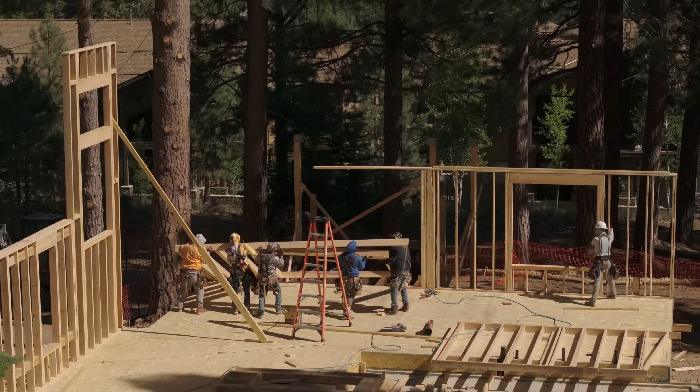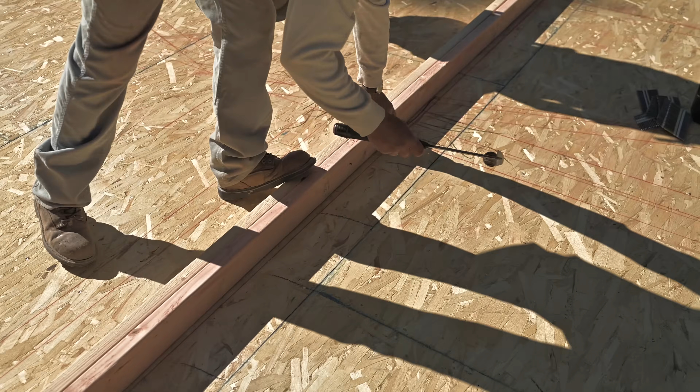First step to building the walls of the house would be we're going to snap the lines. The second would be plating the walls, so nailing together top and bottom. That's the second step. Third step is what I call detail, which is marking where windows and doors go. That's the third step.

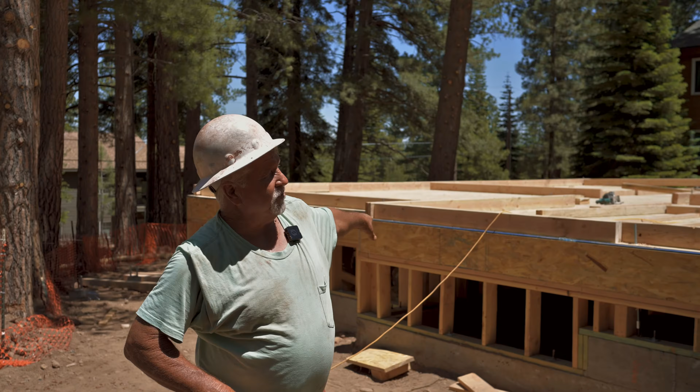So in this particular house, it's not a flat surface that we started with. We have to level out the house. So we call them pony walls. So instead of cutting it down and putting a bunch of dirt, raising it up, doing whatever, it's just easier to build the house with what we call a raised foundation. And then we raise the walls up to make it level to the highest point. So on top of our pony wall, we put the floor joist and the rim, and then that becomes the level surface that we started with for the main floor.

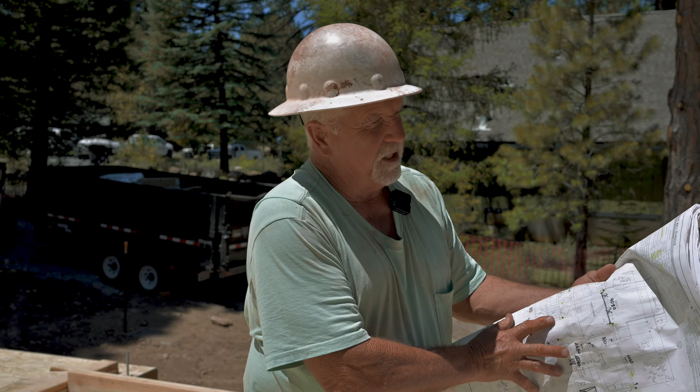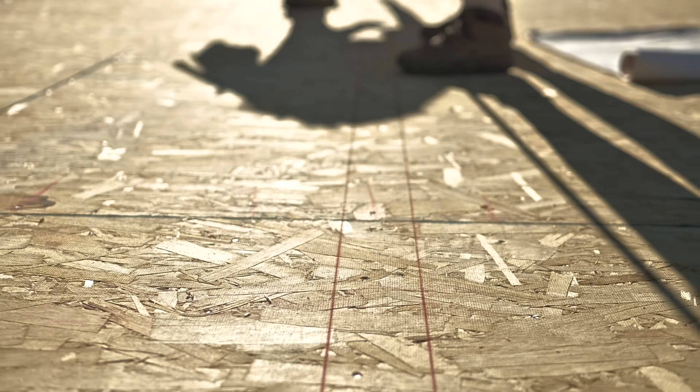First thing we have to do is take what's on the plans and put them onto the plywood, which we snap the lines. Anywhere on here that you see a wall, we snap on here. I use red. And so when we say snap lines, that's what we're talking about. We're marking where the walls go. So what we normally do is we start with the two longest points. So that would be the back of this house. We start there and then we do the far side.

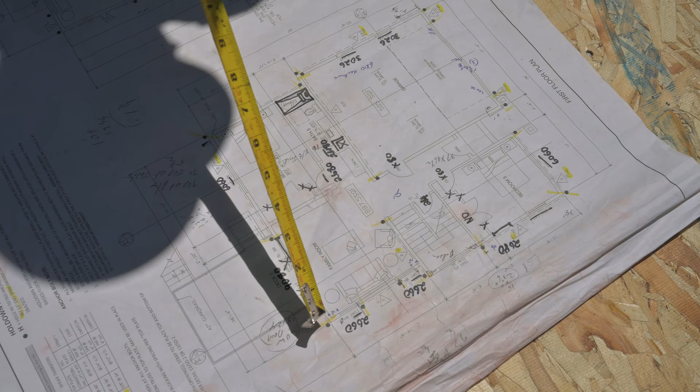Okay, so when we start to snap the lines, we try to start with the longest two points, two walls, which would be, in this case, the back of the house. That's this wall. So we start with this, and then we want to start with the longest side, which in this case it jogs. So we come back the distance that this is, which is 2 feet. So we come back 2 feet here and we go snap this line all the way across.

We make a square, which is basic 3, 4, 5 square. So we go out 15 feet, 20 feet, and then diagonally, we want to be 25. That's basically how you pretty much start almost any house you do. You want to start with the two longest points and go from there. I use a red chalk because it's easier for me to see. This is a chalk box, basic chalk box. It pulls out the string like that.

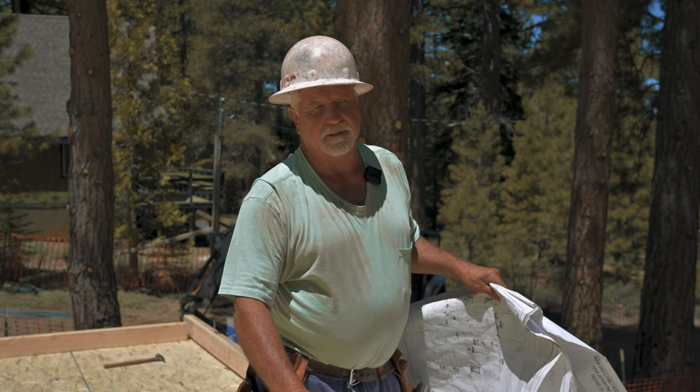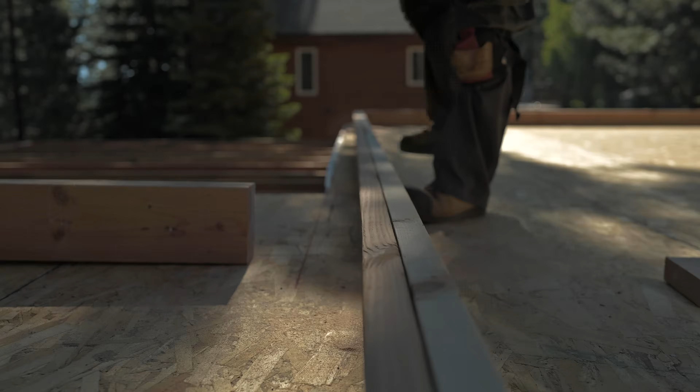The guys have already come along, and the next step they're going to do is they take the top and the bottom of the wall and they nail them together and put them where they go for me to come along and mark what is in the wall. Because if I don't do that, they don't know where anything goes. So what we're doing is these two walls right here. We have a window here, he moved it, so I'm going to mark where this goes. And you'll see how I write. I start from the top, go down.

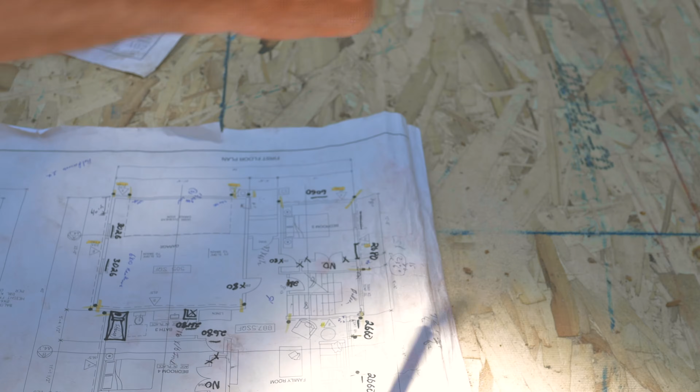This window actually just sits on the floor. It's one of those more contemporary windows, so there are no cripples. This one, you'll see I'll have 3 numbers on it. One is the header, it goes across the top. One is the trimmer, and the other one is the cripples. That's how high it is off the floor. So we'll start here, and then I'll do the front one so you can see what I'm talking about. So it's a 2.6, which is a 33-inch header.

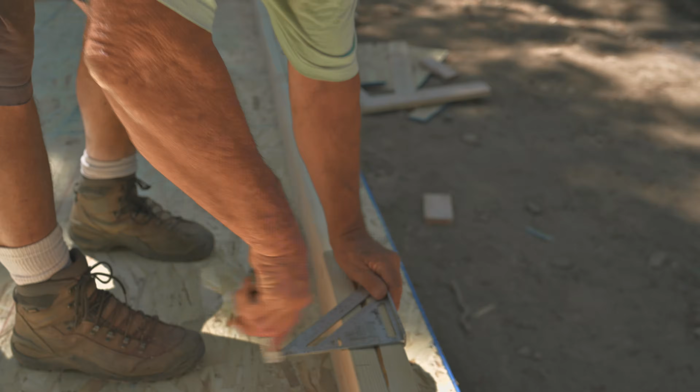That's where this stud goes. The trimmer is my slash. I just put a slash, not a T. Some people do that. I only do that if there's 2. So my guys will know that X is the king stud, they call it. That holds the header, and this is the trimmer, which supports the header. So in this case, you have a 33-inch 6x10, and it goes to the top, so it would be a 94 3/4 trimmer. And like I said, this window goes to the floor, so there's no cripples. So it's just open. It's almost like a door. This is a 6-foot window.

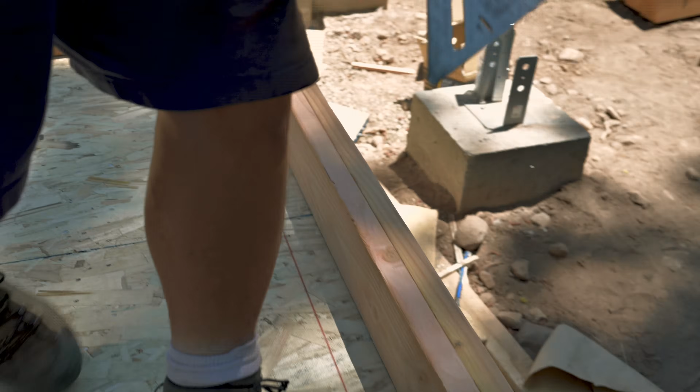Usually anything over 5 feet, you want 2 trimmers. So in this case, I put the slash, and I'll do a T like that. That means 2. Same thing on the other side. So they'll see that. And it gets 2 king studs also. And then a slash with 2, that's 2 trimmers.

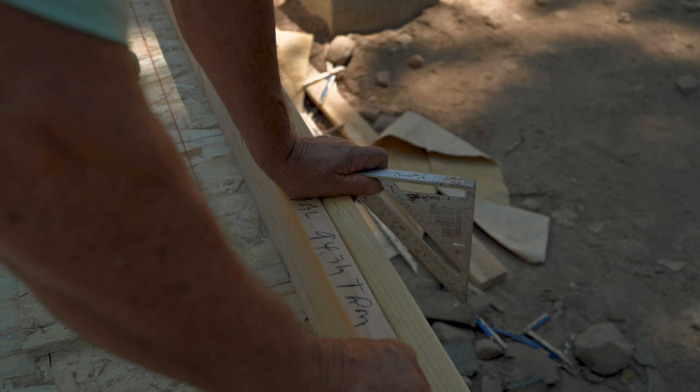So in this case, it's a 78-inch 6x10. That's the header that goes up to the top. And it says double. 94 3/4 trimmers. That gives them the height of where the window ends. And then in this case, it's a 6-foot window by 6 foot, so it's 19 3/4-inch cripples. And they know that it has double sills, so it'll be basically a little bit over 2 feet off the ground. You'll see the next stage is actually picking the walls up and raising it.

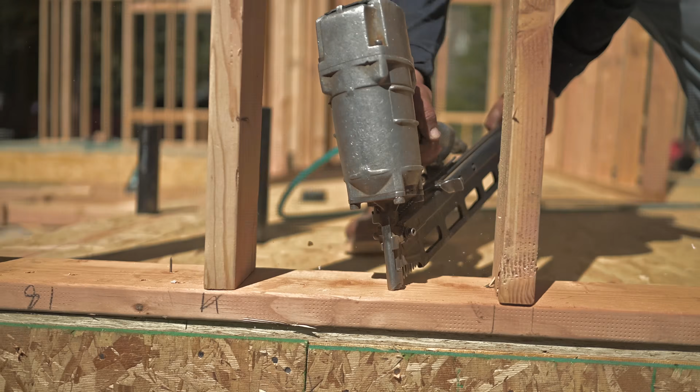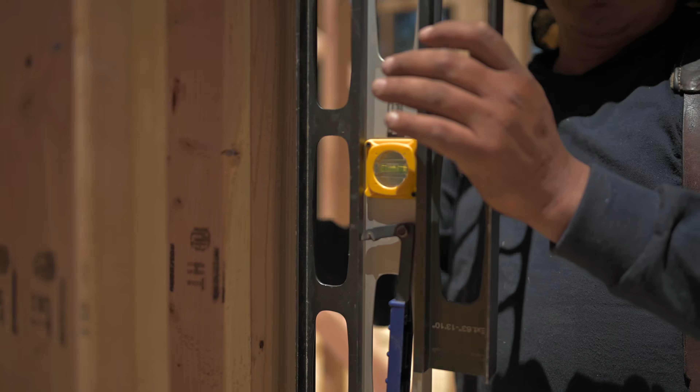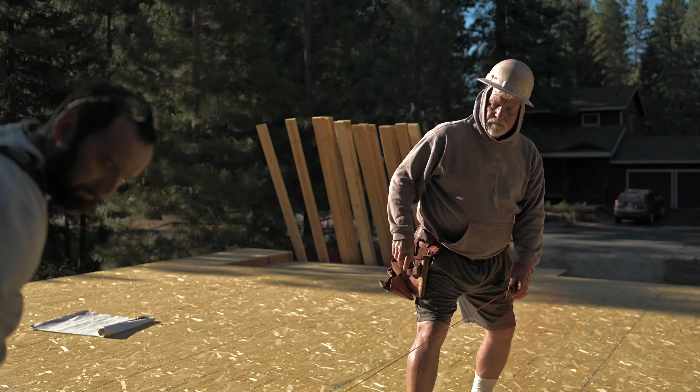Now we're up on the second floor, so we're doing the same thing. We're doing layout. So we snap the lines, and that's where the walls actually go. When we say snap lines, that's what we're referring to, is taking the blueprints and putting the lines out where the walls go. That's the first step. Second step is what we call plating. You take the top and the bottom plate of the wall, and you nail them together with just a couple eight penny nails so it comes apart easily.

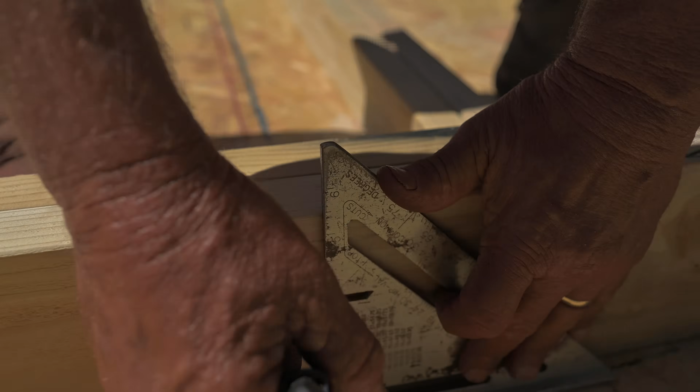And then I go along and I mark on those walls where the windows go, the doors, whatever goes in the wall I mark now, so the framers can come in and put it together. So you're the guy that reads the plans, and then you draw that floor plan onto here, and then the framers build the walls. Correct.

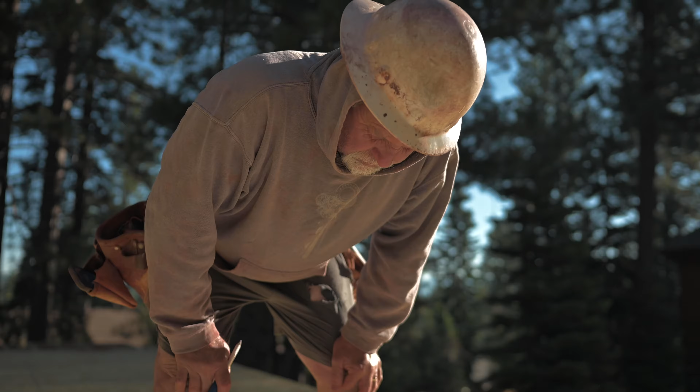Now tell me, the outside walls are 2x6s, right? Yeah, actually up in Tahoe, most walls are 2x6, but yeah, the outside is 2x6, and it's mostly for insulation value, plus also here with snow load, we can get a bigger header in the outside wall, so that's the main reason, two reasons that we use 2x6s. Then inside, yes, there are some in this house that get 2x4 walls. They're just the smaller walls. There's no structural integrity that's sitting on them, so you don't need a bigger wall.

Now, a floor like this, how long does it typically take to do the snapping lines and plating? Snap, plate and detail, that's what we call layout. 2-3 hours. We started this morning. We're just about done. And then this house was a little different. Yeah, so what we did is we actually built the slope of the inside ceiling on the floor. So it starts out at a 9-foot wall.

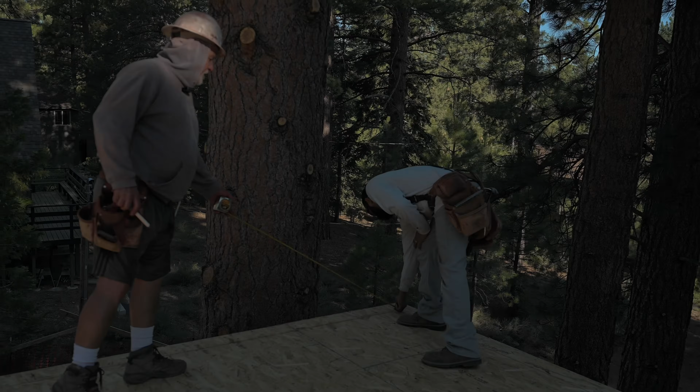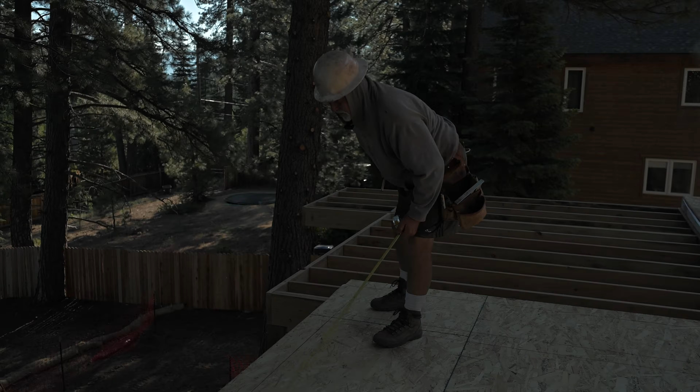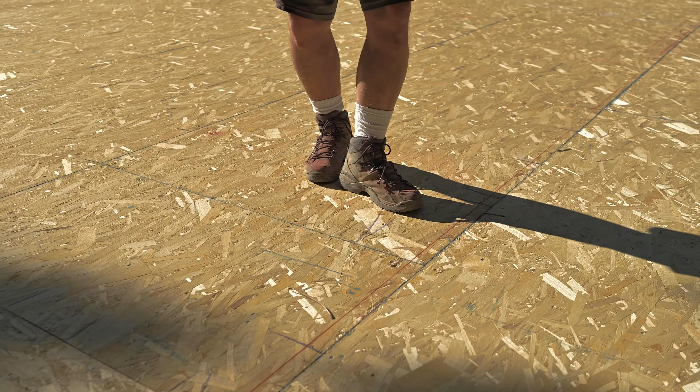So I measure from the inside of the outside wall 9 feet 3/4. And that's where we start, and then we come this way. We have 18 feet to this point right here. I'm a little old school, so I mark the height of the 9-foot ceiling again, and then 4 times 18 is 72. So from my 9-foot ceiling, I mark 72 inches. And then I snap the 9-foot point to this point, and that makes

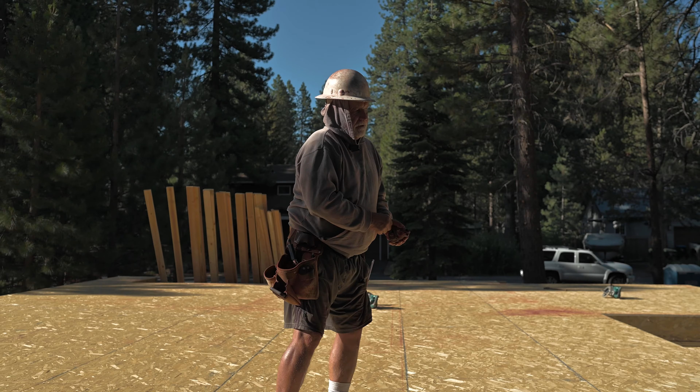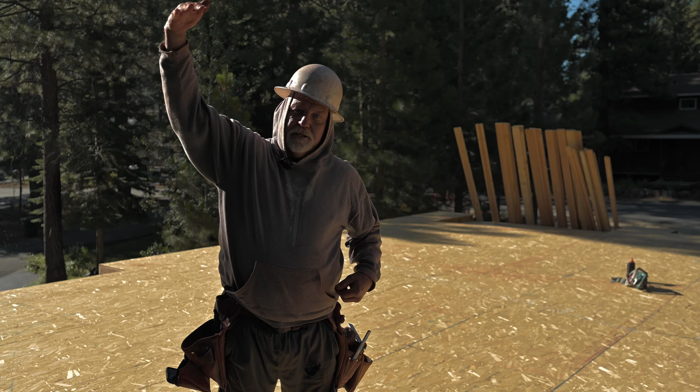the inside sloping ceiling. And I come down 3 inches because you put two plates on top, so they're like this, and then the guys will know how to frame the wall. So when it's finished, they'll stand this up from the ground, and it'll be a rake ceiling, a sloping ceiling wall on the outside of the building. And so they'll be able to follow, the trusses will follow that line, and they'll end up with a vaulted ceiling.

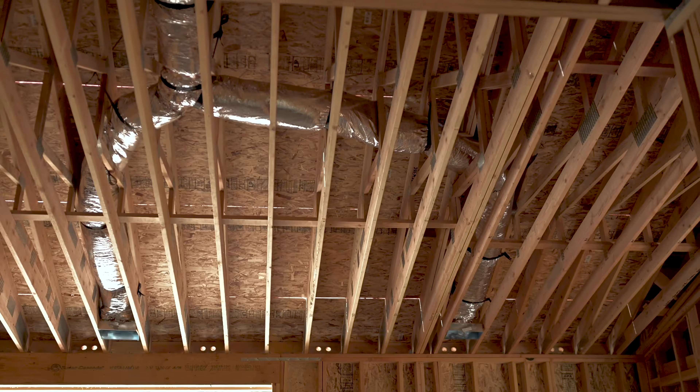So when you walk in a home and you see the vaulted ceilings, if it's a cut stick roof, you have to match the pitch of the top of the actual roof. These trusses are made with a different pitch on the inside. I think the roof is a 6-12. The inside pitch of the rake wall is a 4-12. So it just depends on how it's built. If you have the truss calculations, the book in the trusses, it'll tell you the starting height and the ending height. So you can just copy what they have.